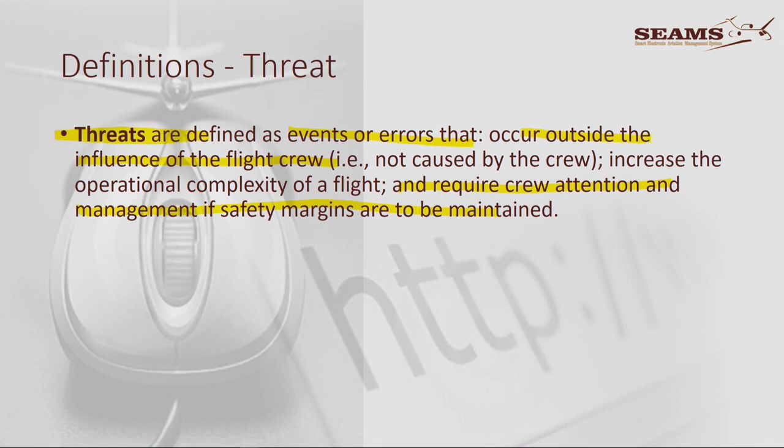Anything from outside the cockpit that can interfere inside, that is then called a threat. All right, and it requires crew attention and management if safety margins are to be maintained. I think a lot of times threats are things that we can determine beforehand, and that's exactly what we want to do. We don't want to wait until we're airborne and then look around and by chance actually become aware of the typical threats of the environment. That's like flying in a special rules area and not expecting to see other aircraft. It's not the way that it works.

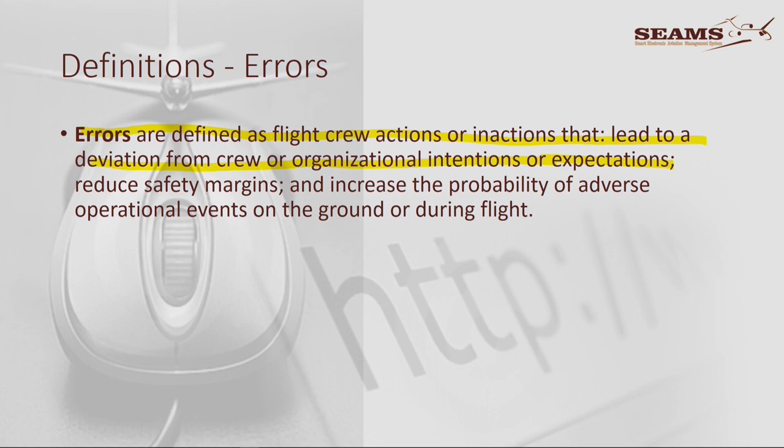All right, however, let's have a look at the definition of an error, because remember we talked about threat and error. What is an error? Error is defined as flight crew actions or inactions that lead to a deviation. In other words, it's very clearly here a deviation from the intentions or expectations. Now, where do we get our expectations from? Expectations are the end result of planning, because we plan certain expectations which we need to meet on the way, on the roadmap until we get to our destination.

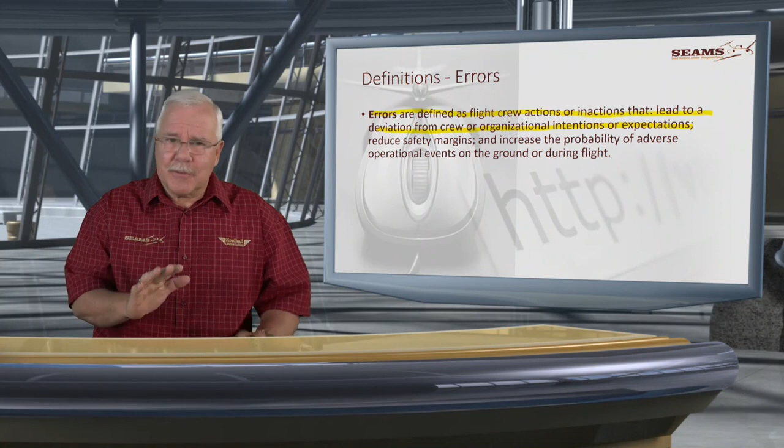Yeah, it's a full journey from the outset. From the moment that you start the engine of the aircraft, you're starting a certain journey, and there will be threats and errors all the way. From the taxi, the takeoff, the climb out, the cruise, approach, final approach, landing, until you're back in the bay to shut down.

Does it mean they're bad pilots or poor pilots? No, they made an error. So the point here is that threats, such as an engine cut, we can sort of anticipate, and we can think in this environment we can have other aircraft that may be on the way, basic stuff like that. However, we must also consider, once a threat is presented to us, what are the errors that we can make? And one of the errors that we can make after takeoff, if there's an engine failure, is to apply the wrong standard operating procedure, all right?

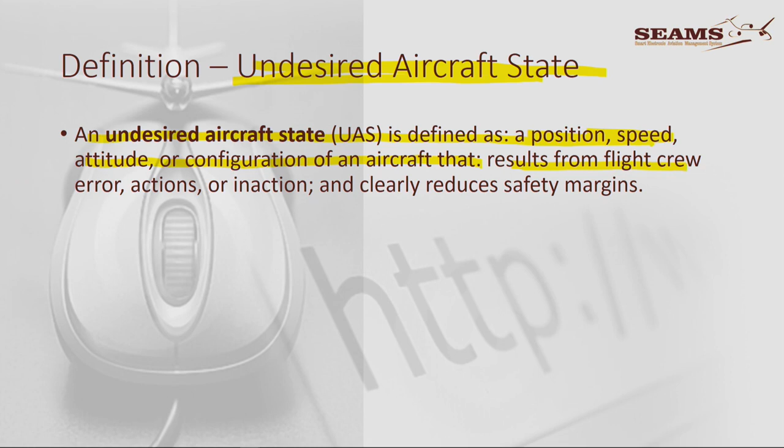And then the next one I've got here is the undesired aircraft state. Undesired is defined as a position, speed, attitude, configuration of the aircraft that results from flight crew error, actions, inactions, and clearly reduces the safety margin. In other words, the undesired aircraft state is the aircraft is not in either a configuration or in an attitude that is desirable for the kind of flight that we're doing.

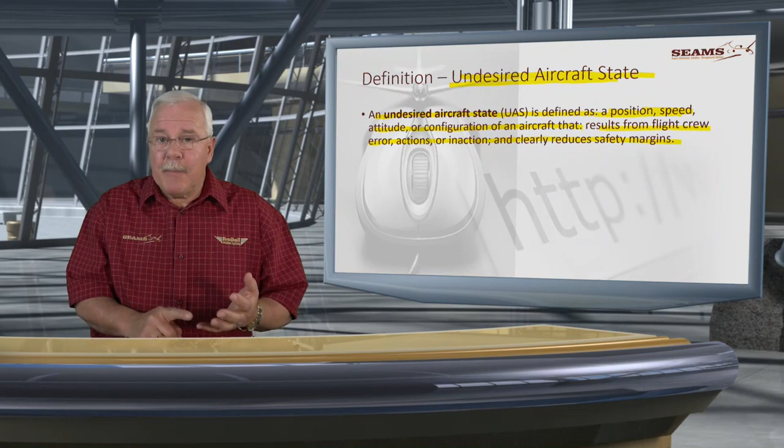To be upside down on an aerobatic aircraft, when you're busy with aerobatic practice, that's not an undesired state. But in an airliner, that could be. In a Cessna 172, when you're busy with route flying and you find yourself upside down, not a good story. And that also goes, obviously, for your aircraft configuration. And here we're talking about flap settings, power settings, undercarriage, and so on and so forth.

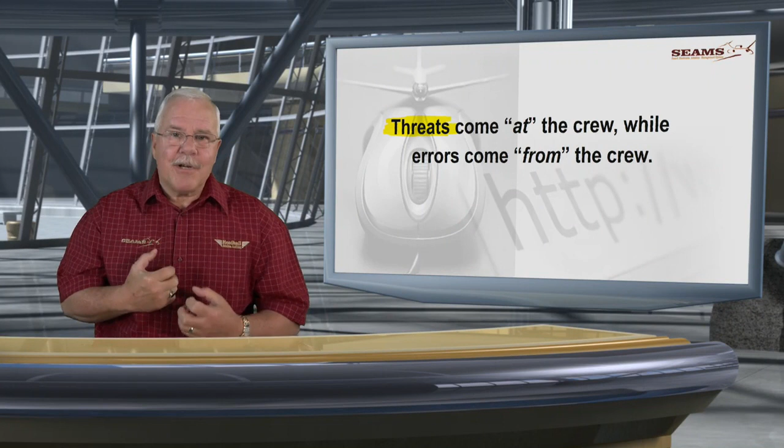Errors is the stuff that we make. It is from us. All right. So just remember that threats, something that's from the outside. Errors, something from the inside.

Now, remember, I said that I want to talk about the cockpit distractions. So the first thing that I need to say here is to reintroduce this thing about a sterile cockpit. And when I talk about sterile cockpit, there's obviously different ways of interpreting that. And I probably should just go to the next one and explain what I'm saying.

You know, I sit a lot of times with the guys flying, testing them, and they're game pilots. And I said to him, I would like to do that. And he looks at me, and I said, hey, we're sitting 20 foot above the ground. We're busy chasing a buck. And when I speak, you look at me? Really?

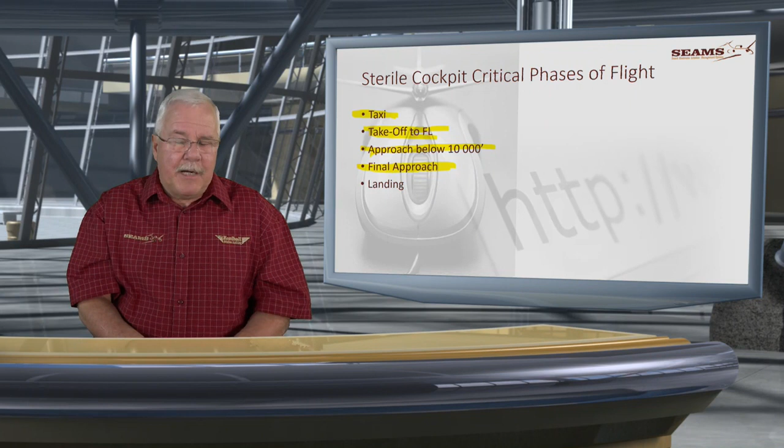Final approach. Now, why I'm saying final approach, that is the last part of the approach. In VFR conditions, you should be established 500 feet above the ground on the final approach with all interceptions done and the landing configuration set. That's an ICAO standard, all right? If it's IFR, then it's 1,000 feet.

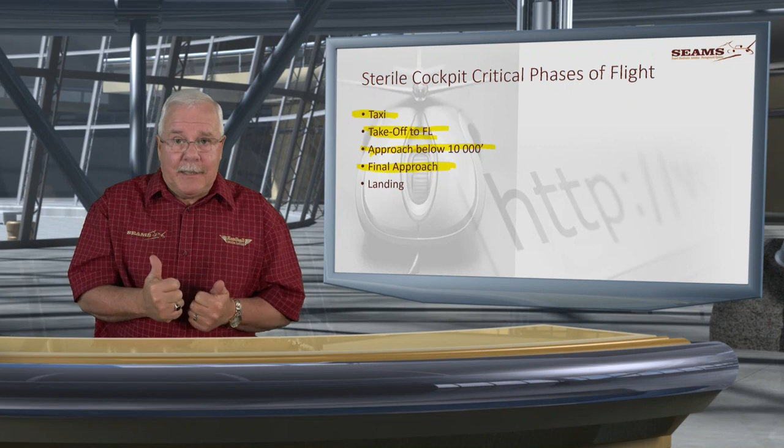The point here is that from that point on, or even before that point when you prepare, you can't get onto the final approach segment of your flight and be busy with other things. The only thing you have to do now is to maintain your glide or your approach path and to actually safely land the aircraft, and then obviously there is the landing.

Remember that sterile cockpit, as we understand it, is, you know, the information that needs to go in and out. But I need to bring something else to you. There's also cockpit ergonomics.

What is where? Is it a neat and is it a clean cockpit? And a lot of people that I fly with, I will say, no, fix that up. I like a neat cockpit. Whether that is a bug setting or something lying around, it doesn't matter. You want everything in the right place. So ergonomics is going to play a role as well.

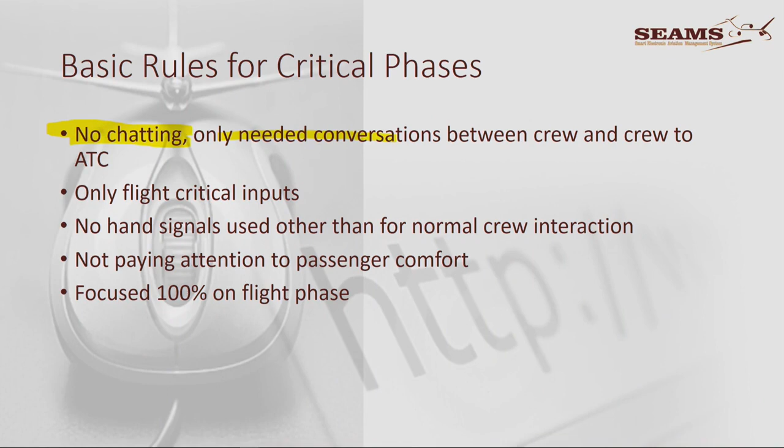Right. Basic rules, no chatting. Only needed conversation between crew and ATC. Okay. No chatting. No chit-chatting. No deciding on what is nice, what's not nice, what is good, what is not good. Nothing. It cannot be. All right? This is not the time to say, oh, do you see this? And, ooh, that. No. Only flight critical inputs.

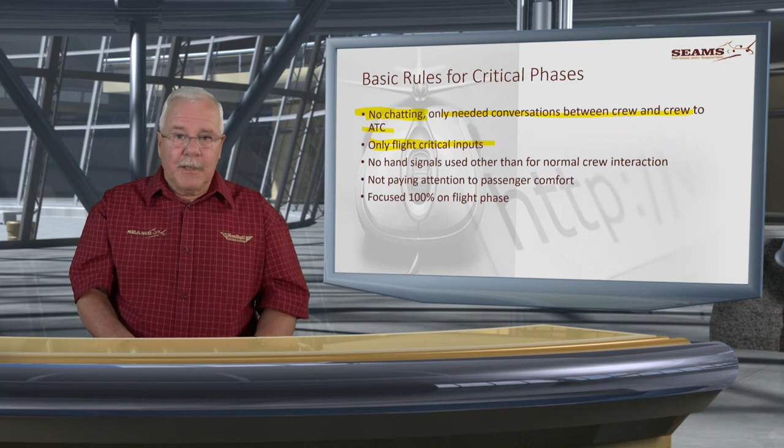In other words, if there's another aircraft storming onto you, or you're on one of the remote runways and a buffalo is trying to run over you, or something like that, that's different. No hand signals. A lot of times people want to start talking. Those are all attention grabbers. Sit and do nothing.

Well, not you, that's the pilot. Obviously, you're doing the flying. The rest of the people, keep your hands and everything still. Don't do anything to distract the pilot. Not paying attention to passenger comfort. In the critical phases of flight, don't worry if this guy needs a drink or that one needs this and that and so on.

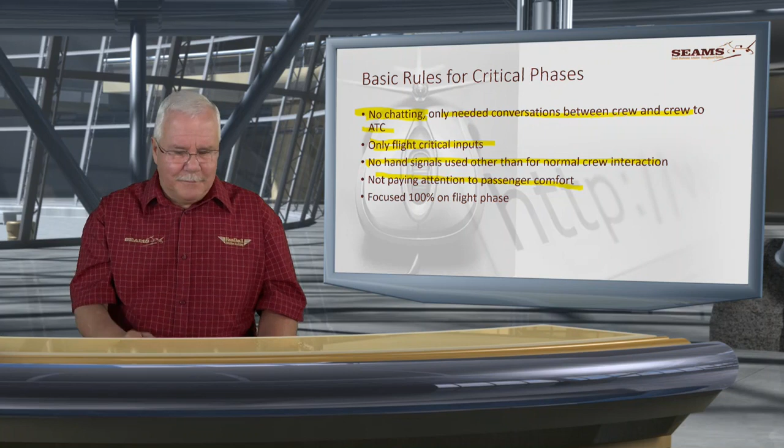No, they briefed. And that is why in the airlines you've got your little ding-dong saying, ding, now you must sit here, and dong, now we can do this and all the rest. That's fine. We haven't got ding-dong systems inside the smaller aircraft. So you've got to become the ding-dong. Okay. Focused 100% on the flight phases. That is where your attention must be. There mustn't be a split of attention.

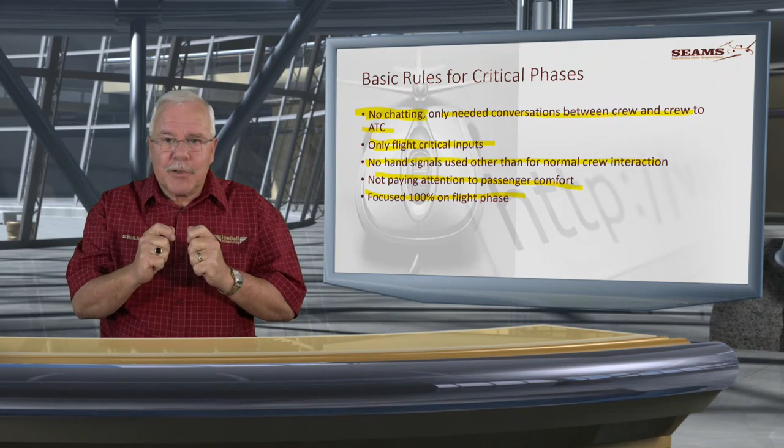Don't let your attention be stolen or hijacked by anything or anybody else that cannot help with what's going to happen. This looks quite serious. These guys are flying in, but it looks like they've got everything under control, except that they can't see too much. Well, they're probably established on the ILS.

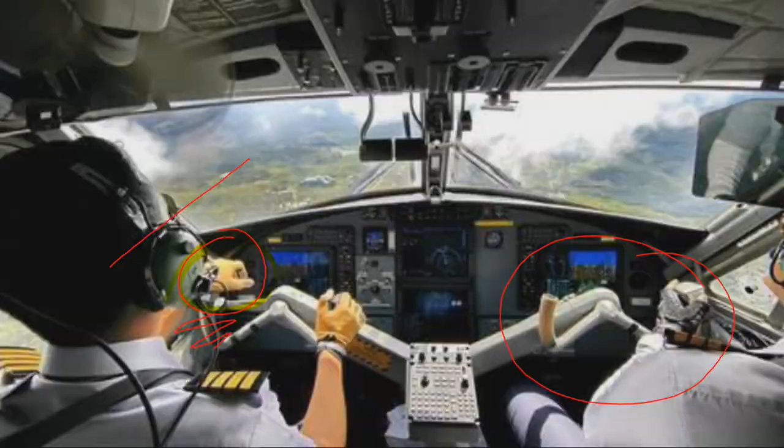And if I look at this pilot's left hand there, then he's not very stressed, because normally when people get stressed, that hand would come and grip immediately on there as well. He's looking up slightly. The face is lifted up, and on this side I don't see any hands trying to even get closer here. So it's safe to say that these guys are not in a bad condition at that moment in time.

So let's have a look here at the typical attention stealers: chatty passengers. All right, that is always like that. A door opening. Listen now, it happens. You take your helicopter off, the door opens. What do you do? You take off in your small aircraft, the door opens. What do you do? Well, I can tell you what not to do. I'm going to say it just now. But for now, these are the things that seriously grab the attention. But they're not showstoppers, okay? Chatty passengers, these things we can manage, or should be able to manage.

Okay, here we're looking at a cell phone. We've got incoming calls, incoming messages, alarms that are set that go off. Really, it's the most amazing thing. A cell phone is something that has got preference in attention over everything else. So I'll tell you just now what I think you should do with your cell phone.

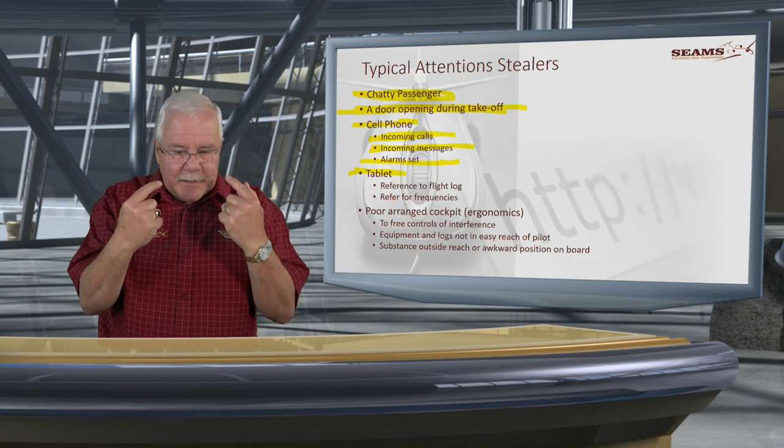Tablets, these tablets that we're flying around with, are just in between a laptop and a cell phone. The fact is, if you're trying to reference smaller written stuff there and page on it and interface with it, come on, these things are stealing your attention. During the critical phases of flight, your attention is not needed to be focused inside on something.

Yeah, no, you think that you're cool and you can do that, and you've practiced it and you probably got away with it 1,000 times. I'm not worried about the first 1,000 times that you got away with it. I'm worried about the 1,001st time. I might be the passenger in the back, and that, to me, is a problem.

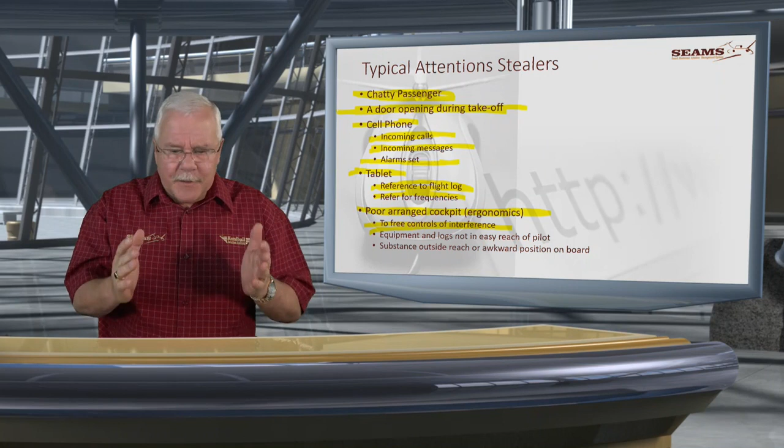Poorly arranged cockpit ergonomics: you've got to free the controls from interference. Man, we have seen that. Helicopter, people with cameras and stuff, and it's all over, and they can switch off hydraulics and they can hook on something, and especially in helicopters where you've got extremely sensitive control inputs, these things are basically devastating. So, you know, there is a protocol.

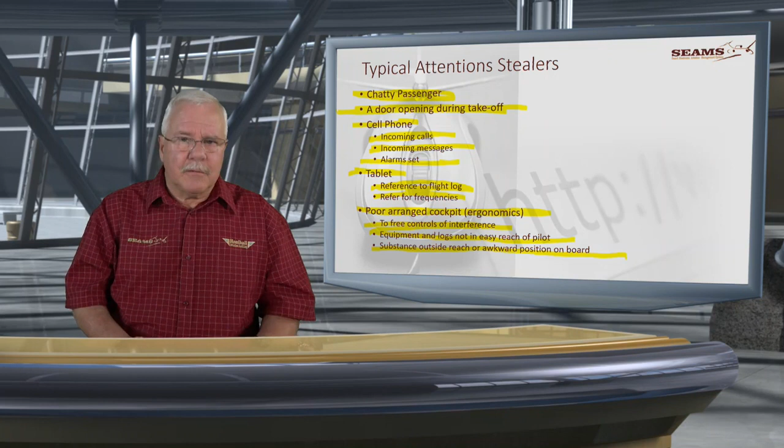The arrangement of the cockpit: equipment and logs need an easy reach. You know, all your log cards and your maps and stuff, where you can't get hold of them, and it's here and there, and it's all over the place. It can't work. Everything must be in easy reach. And the pilot must not need to turn his head more than is needed and grab things from the back seat and stuff like that. Keep your water close to you. You need that little sip. All right. Okay. I think that point is taken.

Antidote required to guard attention. First of all, brief the passengers. Work out hand signals to get the passengers' attention, to be quiet or when they can speak. In the helicopter you're sitting on top of each other's laps, basically, in the small aircraft as well. So I brief them: listen, guys, when we're up there, if at any stage you see a hand like this, it means shut up. Don't say anything, do anything, touch anything, move anything, because I need full concentration. And if I show this, we can talk. But if I show this, you stop. Simple, easy, works every time.

Man, I go like this, and then we get airborne, and I go, and everybody sits there. And then I go, chick, chick, and then they chat, and I go, and everybody sits still. They don't know, but, you know, so I'm also having fun. But all right, never mind.

Cell phones: out of sight, out of mind. Now, I know you're not going to switch your cell phone off. I know the cell phone is not necessarily going to interfere with the aircraft anymore. Okay, it's true. But if the cell phone is in your sight and starts ringing, you're going to look at that, and you're not going to look at the critical phase of flight in front of you. And that, to me, is a problem. Because it's insignificant, a little message coming in or some rubbish. What are you going to do if it's a phone call anyway?

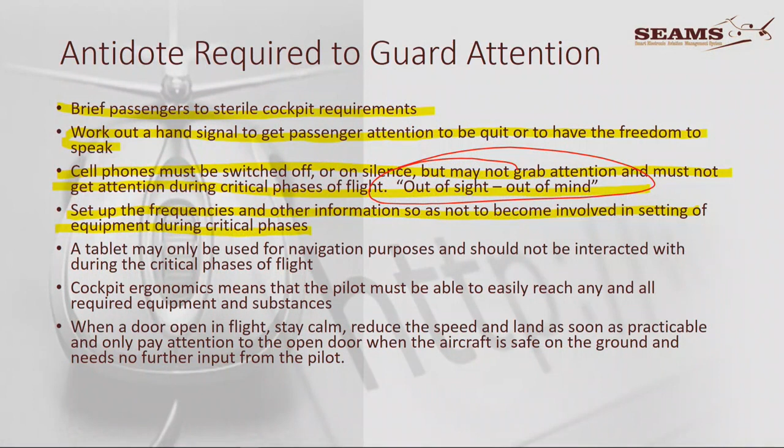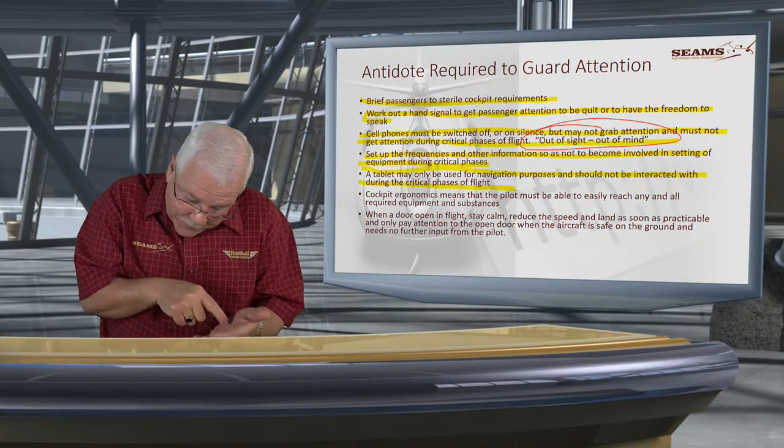A tablet may only be used for navigation purposes, and even so, the problem is when we start interfacing with this stuff and we look in here. That is my problem, because your head is supposed to be out there. We're talking about VFR flight here, okay? Not IFR flight. In certain critical stages of flight it does really matter. You don't get bogged down. There is a set-down procedure. It's a discipline, all right?

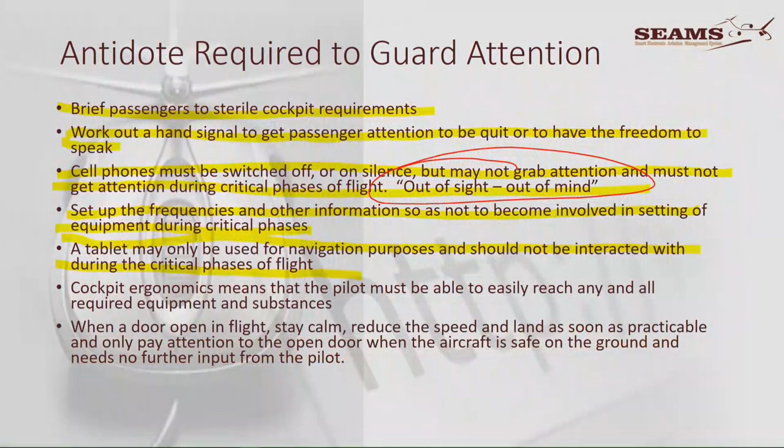Don't get too cool and relaxed, because that's not the time to be so relaxed. Okay, cockpit ergonomics. All that I'm saying is, you know, you can't change where the dials are and where everything is. But you can set up: where do I leave the water? Where's my map? Where's this? Where's that? Everything is nicely arranged within easy reach. And that's what I refer to now.

This is the part where the pilot can ensure the ergonomics. Oh, it's fine if you've got passengers in the back and you say, there's scratch there in my bag and there's a this and that. Yeah, no, that's fine. But if you haven't got passengers, then you can't scratch in no bag nowhere. Now, people have tried this before, and it doesn't work.

You cannot leave your seat in your aircraft. You will die. And the aircraft will be written off. We'll bury both of you. When a door opens in flight, stay calm. Reduce the speed. And land as soon as it is practicable. It just means when the time is good. You don't have to force it.

You don't have to slam the helicopter down on the ground. You don't have to try and fly the helicopter with other hands and grabbing the doors. Silly. That door's not going to fall off. It's not going to blow off. You've got the right little latches and stuff. It goes open and it will sit open that little bit. And that's it. Reduce the speed, come in and go and land.

When you're single crew, look, when you're multi-crew, it's different because there will be other people that can help closing doors. But if the door is on my side of a Robinson 44, 22, and this guy's trying to come over here, they can interfere with the hydraulic switches, they can bump. This guy that's going to interfere here must really understand the complexities of what we're doing. I won't let any silly fool stretch over me in the cockpit. That's why, well practiced left elbow. And same aircraft types, well practiced right elbow. Okay, never mind. But just reduce speed and land the aircraft.

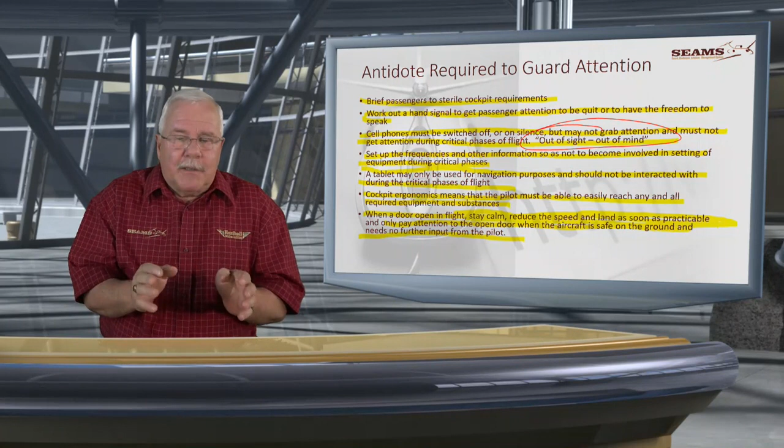On an aircraft, I've also seen where people go into a flat panic. Oh, the door's open, blah, blah, blah. So what? It's not a pan, not for a Cessna 172. When we start looking at bigger aircraft and where it can open up, of course, that can be quite critical to the phase of flight. I just want us in the smaller regime also to have a look and to say, come on, there's nothing to overstress yourself about. Do a normal circuit, land the aircraft.

Somebody said, "Ooh, my door opened" three quarters through the flight. Okay, now we know your door's open. There's no way that you're going to close a Cessna 172's door in flight. Well, probably if you've got both hands and you ram it at your best. Why? Things are going to fall off. Airflow will ensure that it won't go completely open, but it will be just here close to the cockpit. It's really not such a big deal.

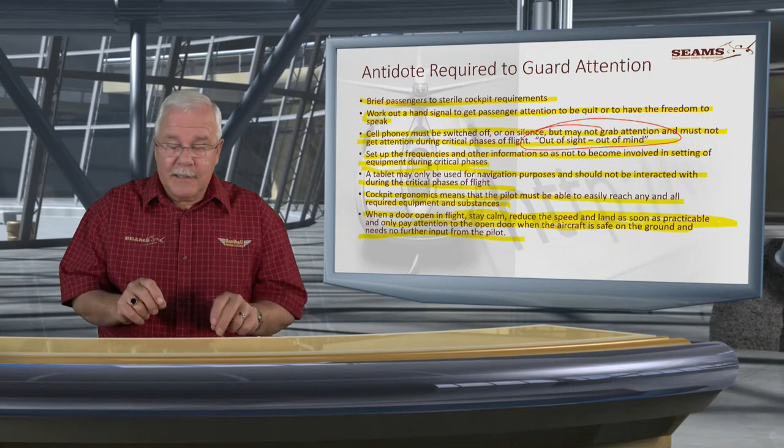Is it a big deal if the cargo compartment door of a 747 or 737 or whatever opens up? Of course, that is a big deal. It is a big deal. This is not what I'm talking about, all right? This is normal, small aeroplane stuff. Yeah, you know, it's

Okay, we've got to make up these things as we go. But remember, we must remember that. You know, every week we talk about this, and we shouldn't do this, and we must do that. And, sorry, at least every month we do this kind of thing. And then people go out there and they say to me, oh, that was nice. I said, well, you know, it's not really. It's only nice if you've learned something. But learning something means that you must apply that something. Otherwise, you haven't learned anything.

Then you've just added more information to fall in that bottomless pit of useless information. In other words, you are just a gatherer of rubbish. Information is only good, and it's only learned if you can apply it. Otherwise, it's got absolutely no meaning. If you do not apply, then it's just as good as you didn't know that. Then it's meaningless. So is the penny dropping? I hope so. I hope the penny is dropping at this thing.

Conclusion? Right, first of all, plan around predetermined attention stealers. Obviously, we now know there's certain things that can steal our attention, and we're going to set ourselves up not to pay attention to them, but to that which gets us airborne, and that which keeps us safe. Decide what are the important things. And it's definitely not that call, and it is probably somebody that you didn't want to speak to anyway.

And if it is somebody that you wanted to speak to, that's cool. But you cannot speak to that person now. So don't answer that person now. Do your job, and when it's absolutely safe, then speak to the person. And all of them, if you say, sorry man, I'm flying, I'm in a critical stage of flight, they say, oh, sorry for bothering. They really don't want to bother you. They don't want to put your life in danger. So don't become silly from your side now, just because you've got a call.

I've got to say this. I remember I was in the era, and a few people probably around, in the era when we didn't have cell phones. They didn't exist. Well, we didn't even know that they're working on stuff like that. All right, but then we were before the computer age. But okay, there weren't cell phones. In the beginning, if you had a cell phone, one of these big bricks, and you got a call, you're important, man. Hello, this is Charlie speaking. And then it's so super cool. You've got this mobile phone.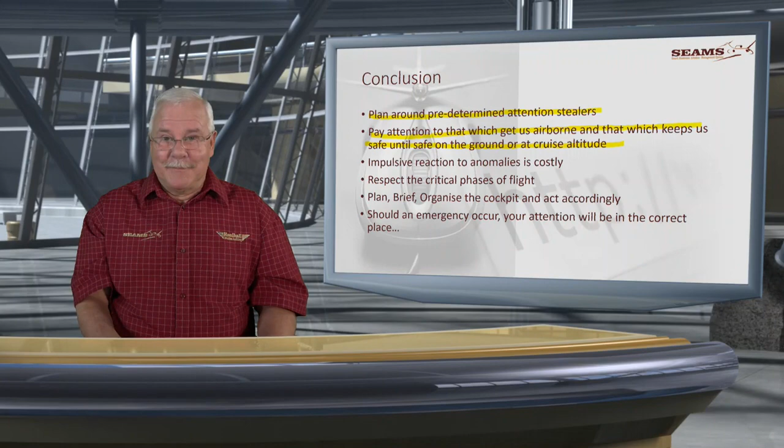But that fad has left, eh? You can't impress anybody anymore. In fact, it's become a nuisance. You impress me more by ignoring and not answering the call than by answering the call. Yes, for sure. Impulsive reaction to anomalies is costly. No impulsiveness. Respect the critical phases of flight. And that is the mindset that I want you to say to yourself. Just come on, look at the specific phases of flight and now start respecting it.

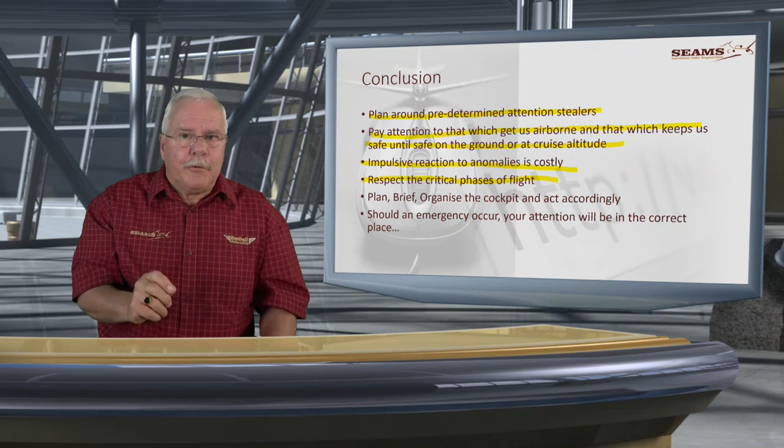Put all the other things away. Pay attention to what attention needs to be paid to at that specific time. In fact, it's only for your own good, to be quite honest. And then plan, brief, organize the cockpit, and act accordingly. Plan ahead. Now I know what all the threats are, and I've briefed myself up so that I can minimize the errors in certain cases. I've now briefed the passengers and the ground and everybody quite properly. And now I'm going to organize my cockpit so that it is ergonomically set up for me. And now I'm going to do the job according to the plan. Plan, brief, organize, fly.

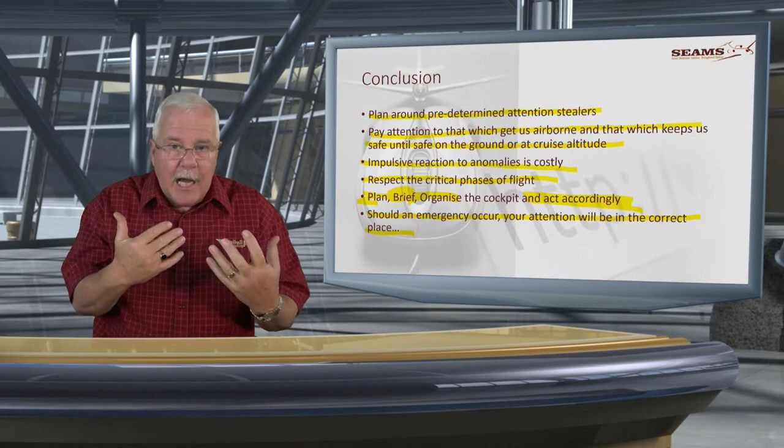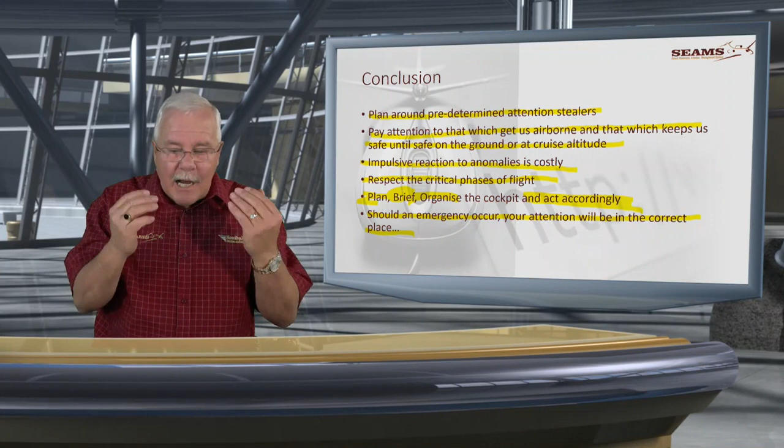Should an emergency occur, your attention will be in the correct place. Yes, of course. You're going to get airborne, you're going to go here, and your attention will be there. Because I'm right there, and now something goes wrong. I've got hands on. My expectation is not that something bad is going to happen, but my attention is everything with the aircraft, and I have got this built in that when there's an anomaly, a delta occurring, I can actually see it at that moment in time.

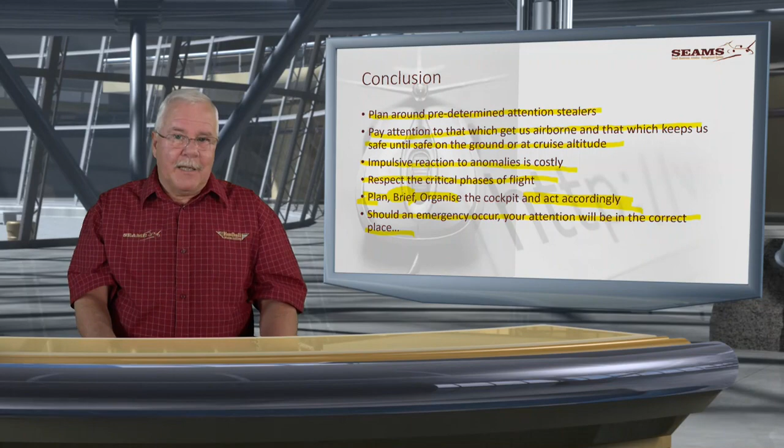Right, and that, I believe, will bring us then to the end of cockpit distractions. All right, go out there, just go and think about these things. Don't let technology become your curse. It's really a blessing. But like all blessings, there's a time for it.